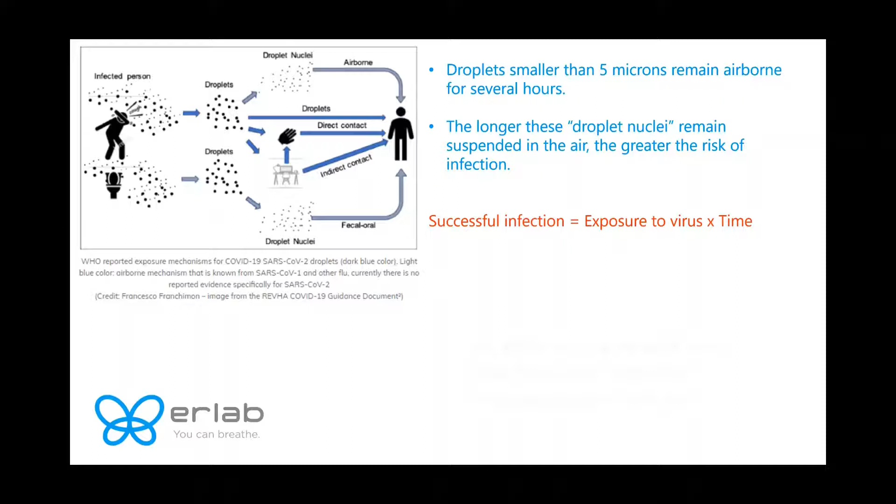So how do we reduce the viral load and time the virus remains in the air? Well, there's many products out in the market today that are promoting 99.995% efficiency at killing the virus. Let's run through them a little bit because these are what I call placebo products. And I want to ensure that when we're looking at a mitigation plan, we're not fooled by some of the claims that are provided. So I want to start with UVC lighting.

The problem with UVC lighting is it's certainly not going to decontaminate air. The efficiency of the UVC is at point of contamination. So essentially, the UVC light has to shine directly on the surface in which it's looking to decontaminate. In addition to that, UVC provides harmful wavelengths that can cause serious damage to skin and eyes.

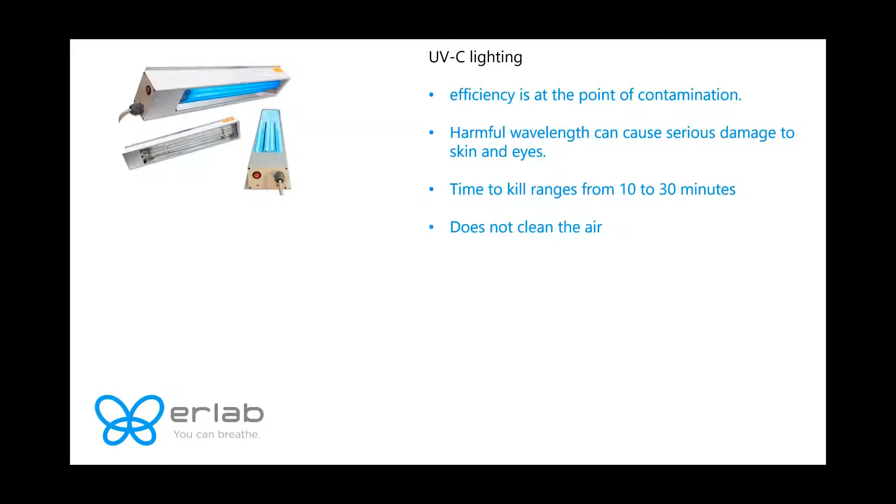And the time to kill, which is called kill rate, ranges from 10 to 30 minutes. So it's not a quick kill like many of them promote. It still takes time to kill the virus, even on a surface. And importantly, it does not clean the air, so we're not reducing the risk of aerosolized transmission. It will reduce the risk, again, of surface transmission in a very controlled environment.

Let's talk also about floor-mounted filtered units. There's many false claims about the product's efficiency. A lot of these companies are saying, take my product, plug it in the wall, it's going to process 500 cubic feet a minute, it's going to provide efficiency within a room of 1,000 square feet at 99.995% efficiency. Unfortunately, that's a very falsified claim, and I'm going to talk about that in a moment.

But let's also talk about the airflow. The airflow of these floor-mounted systems takes the contaminated air down past the breathing zone. So remember, those droplet nuclei remain suspended up in the air. We don't want to drive those down. We want to drive those up and away from the breathing zone. So a floor-mounted system, while it has many different flaws, the biggest flaw is taking that air down and then, again, driving it past the breathing zone.

In addition, it creates ground disruption and air turbulence, and the rated filters, or the rated HEPA filters, are extremely questionable. They're not medical grade filters. In fact, they're about an inch, maybe an inch and a quarter thick. That's not going to provide the efficiency that we need to capture the virus.

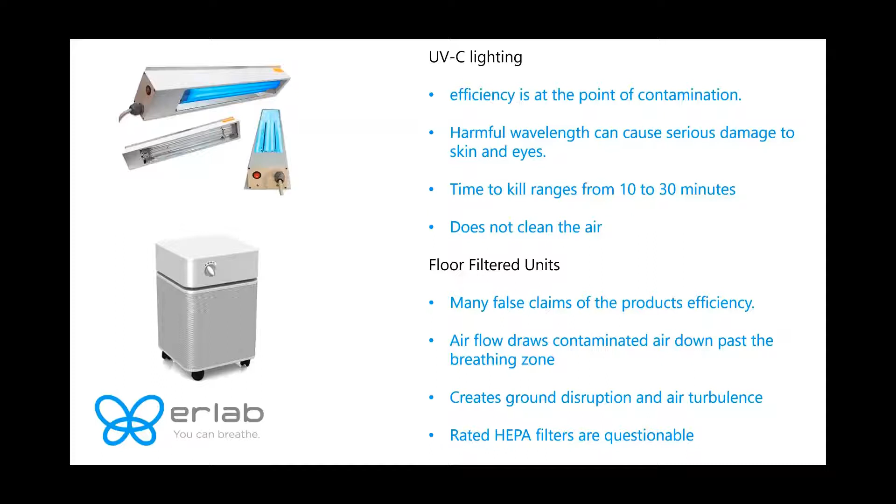But let's talk about, again, the product's efficiency. The claim of 99.995% efficiency, even if they use a medical grade HEPA filter in the unit, there is no possible way, there's nothing out there that's going to decontaminate the space or the air at 99.995% efficiency. What it may do is, once it actually drives the pathogenic particles down past the breathing zone again and to the filter, the filter may be 99.995% efficiency, and that's questionable, but actually the overall effectiveness of taking that air down is a whole different story, and that's the test results that are not shared.

The next solution that many people are looking at is upgrading the building's HVAC, which is the heating, ventilation, and air conditioning system, to what's called MERV13 filters. What's the difference between MERV filters and HEPA filters? Well, it's the overall efficiency rating. So a MERV13 filter will be efficient at capturing potential viral particles, or particles at 0.1 micron, at about 50% efficiency.

So even if we are able to upgrade the building's infrastructure to MERV13 filters, and most systems are not allowed to do the filter upgrades just because of the static pressure drop that happens, the fans within the HVAC system can't handle it. So more often than not, in order to upgrade to a MERV13 filter, as recommended by ASHRAE, they would have to upgrade their rooftop handling units, which is extremely cumbersome and expensive. And even if they do that, again, they're only going to be at about 50% efficiency, in addition to adding a tremendous amount of energy load on the building.

And most importantly, this, like every other product we just mentioned, does not address room level mitigation. So basically, any infected pathogen that's driven up through the HVAC system is dispersed through the HVAC system until it actually gets to that MERV13 filter. So then there's reentrainment to other areas of the facility.

And then there's also ionizer systems or dry hydrogen peroxide systems.

And what this does is really, it disperses ionizers, positively or negatively charged, to rob the pathogen of its life-sustaining hydrogen. The problem with these systems is they're limited based on the needed airflow, so they don't work unless there's actually a fan dispersing these ions. And then there's a density factor of dispersed ions, which will determine the kill rate, which ranges from 60 to 30 minutes.

And what do I mean by density factors? Basically, close to the ionizer, there'll be a greater density of ions that will have a greater impact at robbing the life-sustaining hydrogen of the viruses. The further you are away from the ionizer, obviously, the less efficient these ions become. And the ions only last about 60 seconds, so you have to constantly generate the ions to be efficient. And some also generate ozone, which is extremely dangerous.

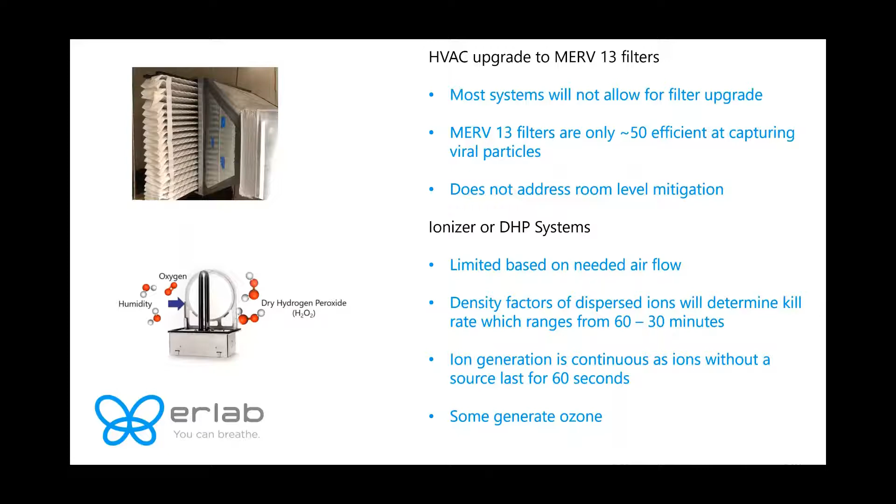So what is the solution? As I mentioned, we offer the Halo, which is a viral retentive air purifier. Again, we have focused on filtration for over 53 years. And what does this Halo do? Well, first, it provides room level mitigation. It captures viral particles and generalized pollutants called PM2.5, which we are going to discuss later on in the presentation. It captures it at the source. So basically, the size of the room will indicate how many Halos we would require to provide extreme efficiency.

The airflow pattern of the Halo takes dirty to clean airflow patterns up and away from the breathing zone. So again, those droplet nuclei that remain suspended in the air, this system actually drives it up and away, capturing these viruses in a medical grade H14 HEPA filter, which provides efficiency at 99.995%. But then we have to look at the overall load concentration reduction.

And this is what you see in the graph below the picture of the Halo. This was testing done by a third-party source called 3Flow. And what we wanted to see is what happened when we had a load factor in a facility and what was the overall reduction. And that's the key critical testing that needs to be performed in order to understand the overall true effectiveness of a filtered solution, which is called ventilation effectiveness.

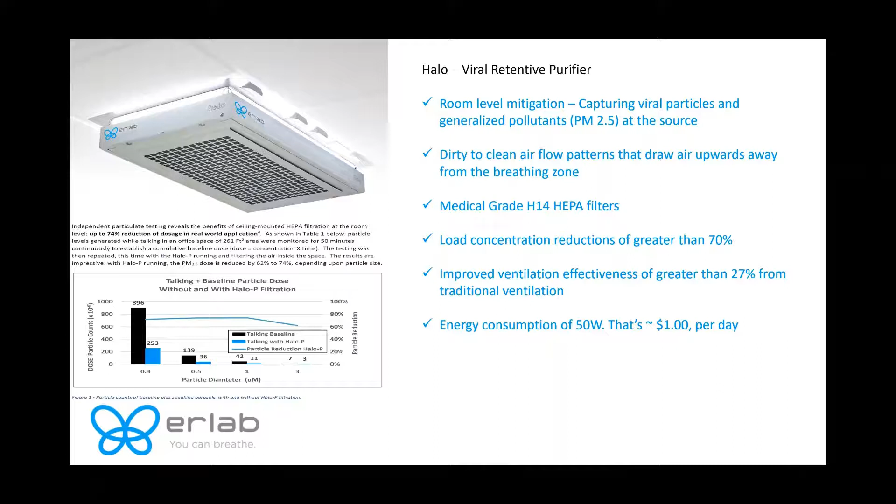These are free filtering systems. The only thing they're connected to is standard 110. The energy consumption is 50 watts, which is on estimated average about $1 per day. So again, you do not have to break into the building's HVAC system. So while it's not as simple as pulling the unit out of the box and plugging it in, you have to understand this is a commercial grade filtered solution that's going to provide you that load concentration factor that is critical to mitigating the risk.

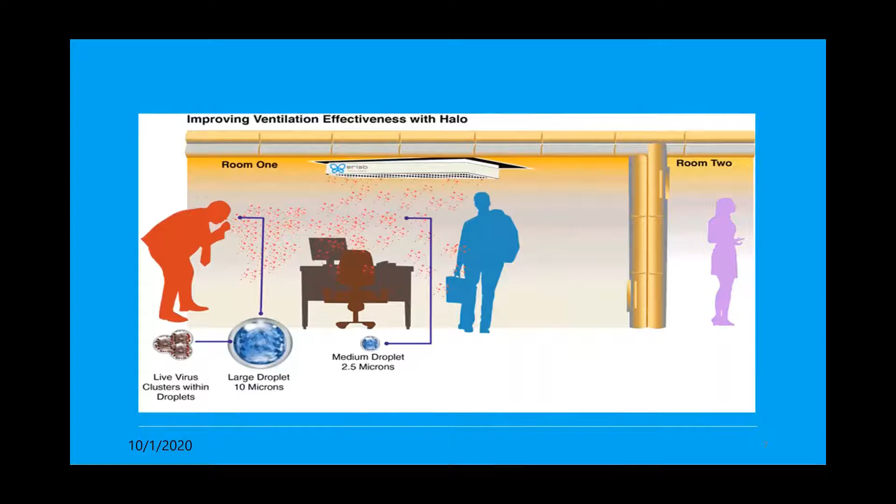And this GIF is going to really show you what happens when somebody sneezes and how a virus spreads throughout the facility, goes through the HVAC system, and can propagate and infect other people in an area that the infected person was not in, and what happens when the Halo's on and how we literally drive those pathogenic particles up and away from the breathing zone, again, drastically reducing the risk of transmission.

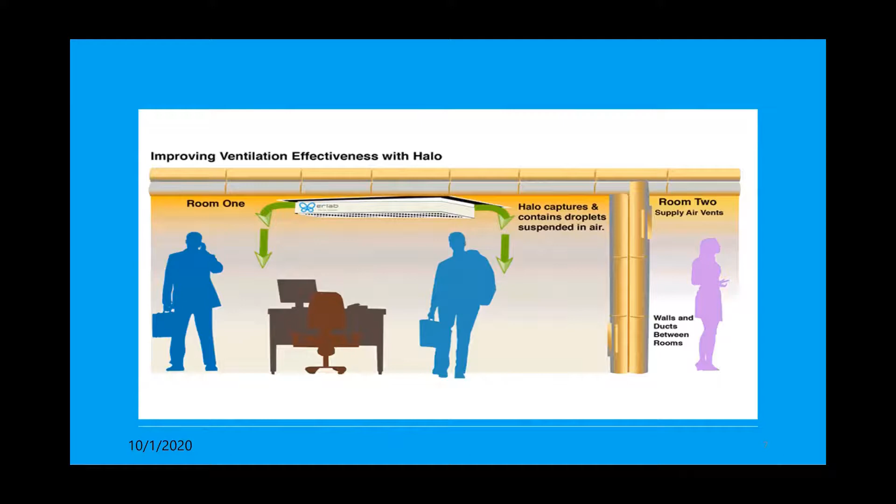Clean air, dirty air in, clean air out horizontally, which is what's called the Coanda effect airflow. So not only do we capture and then disperse clean air, but we also help ventilation effectiveness by reducing what's called dead spots in the facility. So if an HVAC system is not working properly, there's dead spots. There are going to be areas in that facility where you're going to actually have a greater load concentration because you just don't have the proper airflow. So the Halo will also provide you a solution at reducing those dead spots.

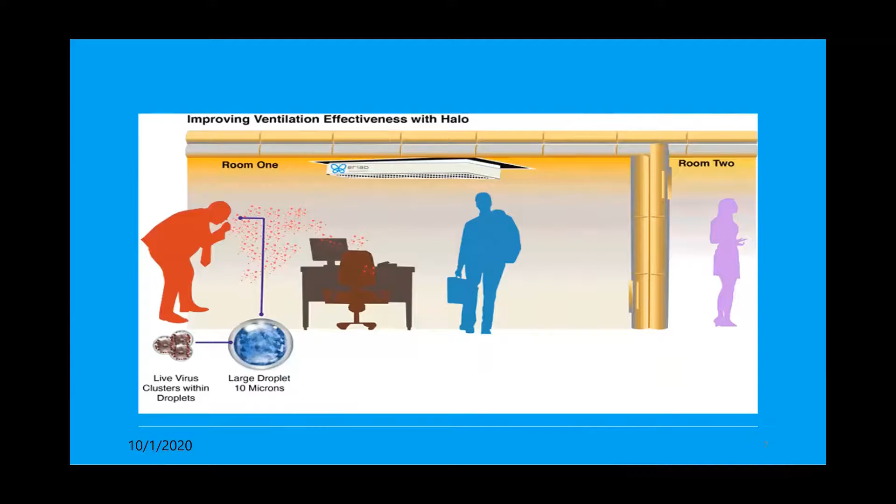I mentioned PM2.5 earlier on in the presentation, and I did that for a purpose because it's critical in providing solutions for today's challenges and tomorrow's challenges. So let's take a little deeper dive into exactly what PM2.5 is and what I call the unseen danger, because it is unseen.

PM2.5 is combustion particles, organic compounds, metals, viruses. It's pollutants that we are exposed to that we are not aware of because we can't see it. The only way we're aware of it is because we end up becoming sick. We end up having respiratory issues. We end up having heart issues. Strokes are a factor with PM2.5. So there's a lot of risk factors if we're exposed to too much PM2.5.

And just to put it in perspective, human hair is 50 to 70 micron. I actually said 10 micron earlier, completely misspoke. Fine beach sand is 90 micron in size. Dust and pollen is 10 micron in size. So it puts it in perspective how small PM2.5 is.

Inhalation of these particles, just like the virus, bypasses the nose and throat and the mucous membrane and will penetrate deep into the lungs and contributes to chronic disease such as asthma, heart attack, bronchitis, and other respiratory illnesses. In fact, exposure to PM2.5 is linked to higher COVID-19 infection and mortality rates, and that's right from the NIH website.

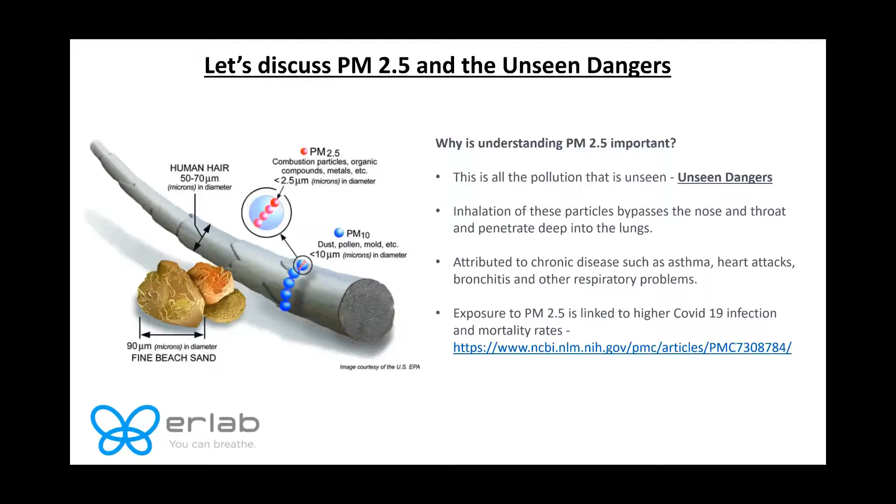This is a real issue, and some on the webinar may have heard of SBS, which is called sick building syndrome. And why do we get sick building syndrome? It's because our facilities are only as clean as the air outside. We're exposed to that, and now we're in a confined space continuously breathing that, and our health is at risk.

Now, if we take it a step further and we look at the death rates that are linked to outdoor and household air pollution, these numbers are staggering. 7 million people die prematurely every year from air pollution, both household and outdoor, and household also meaning our work facilities. 34% of that is heart disease, 20% from stroke, 21% from pneumonia, and so on. We have to come up with a solution to clean the air we breathe.

And this is what we've been doing for 53 years, not just with the Halo, but we've been providing filtered solutions for laboratories specifically, so that they don't release potentially harmful PM2.5 and other pollutants to the atmosphere. So we understand how important this is.

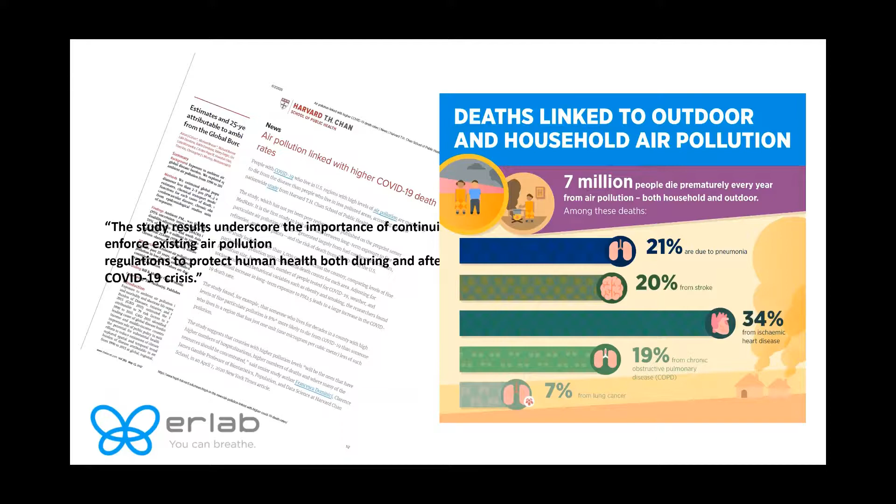Some other graphs: the WHO says 30% of all new remodeled buildings suffer from sick building syndrome. The EPA says sick buildings cost the economy $12 billion annually in lost productivity. The causes of sick building syndrome: inadequate ventilation, inadequate humidity levels, airborne particulates, airborne chemical pollutants. It's all things that we have been preaching for many, many years.

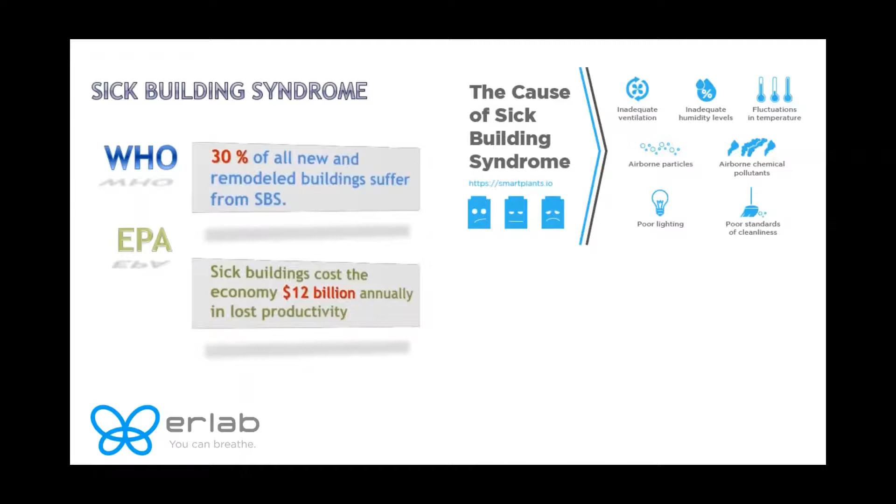We cannot allow dilution to be the solution to the pollution we generate, specifically in laboratories. And when I talk about laboratories, I'm specifically talking about fume hoods. I say that because fume hoods generate some of the greatest pollution on the planet, because they're constantly mixing chemicals and throwing them out into the atmosphere, hoping that dilution is going to take care of it. But unfortunately, it's drastically impacting us every day.

So in summary, we must look at solutions that deal with today's issues, but also look forward to tomorrow's challenges. We're not just in it to come up with a solution for COVID-19, though we're glad we're able to. That's not what we're in business for. Filtration, when used appropriately, provides a significant impact to overall ventilation effectiveness, as we discussed, and reduces the risk of PM2.5 and overall viral load factors. And that's COVID-19, influenza A, B, rhinovirus, any virus that becomes aerosolized, which are many.

While there are many options available and some that look appealing due to cost, we must look at all the data to determine the best solution for our facilities. And yes, I know cost is a driving factor, but please do your research. There's a lot of false claims. Pollution plays a significant role in the global burden of disease. Again, as we discussed, you go on Google for 10 minutes and you search PM2.5 and the effects of just COVID-19, and you will see a tremendous amount of data. This is also where filtration can contribute and benefit well beyond the halo, especially within the laboratory, as I discussed earlier.